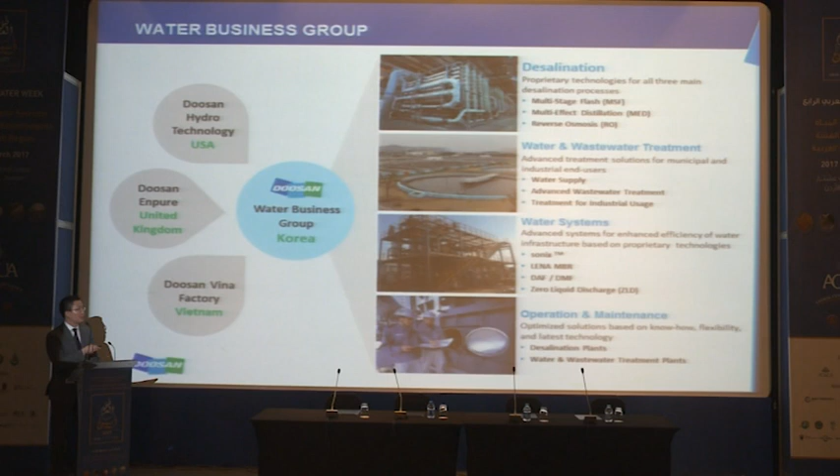Traditionally known as the powerhouse in the thermal desalination market, we have significant references in both MSF and MED markets. One example is the Yanbu Phase 3 MSF plant that we have executed for SWCC of Saudi.

The plant itself features the world's largest multi-stage flash evaporator, which creates more than 91,000 cubic meters of fresh water per day out of one single evaporator.

In the MED sector, we have the Yanbu Phase 2 expansion MED plant, which features the world's largest multi-effect distillation distiller, and the single unit capacity of the plant is more than 68,000 cubic meters of water per day.

Depending on client needs, driven by fluctuations in seasonal or regional variations, we also offer a configuration of hybrid plants, meaning combining the membrane RO solution with either MSF or MED.

One great example is the Ras Al Khair Phase 1 hybrid desalination plant located in Saudi Arabia. Upon completion, it's said to be the world's largest desalination plant, with a capacity of more than 1 million cubic meters of fresh water per day.

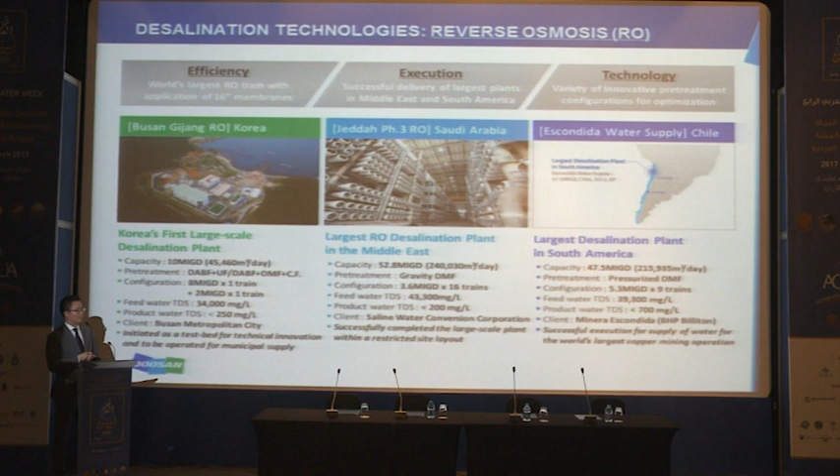We also take care of the plants that we build by providing flexible O&M services. Our strengths in O&M really come from accumulated commissioning experiences over the last 30 years.

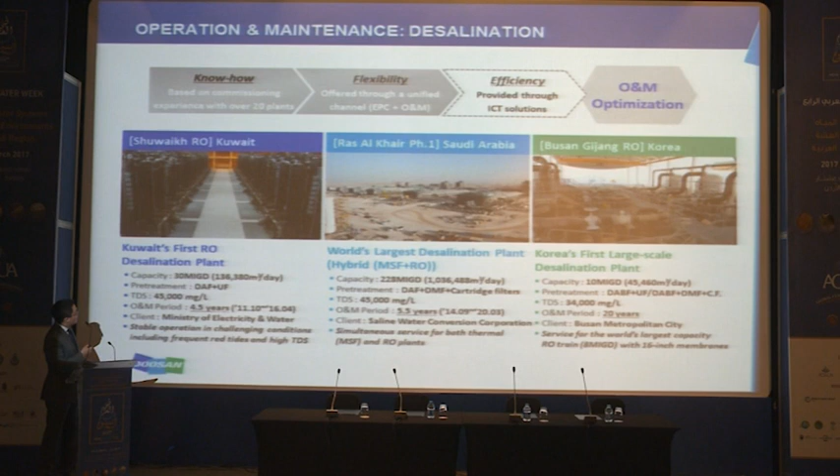We also provide flexibility for our clients by becoming a unified channel of EPC and O&M contractors. For the Ministry of Electricity and Water in Kuwait, we were the EPC provider for Kuwait's very first RO desalination plant.

Shuwaikh RO, and the client entrusted us to provide operation and maintenance services for them on a 4.5-year O&M contract. Also, going back to Ras Al Khair, we are currently providing 5.5-year O&M services for the client SWCC.

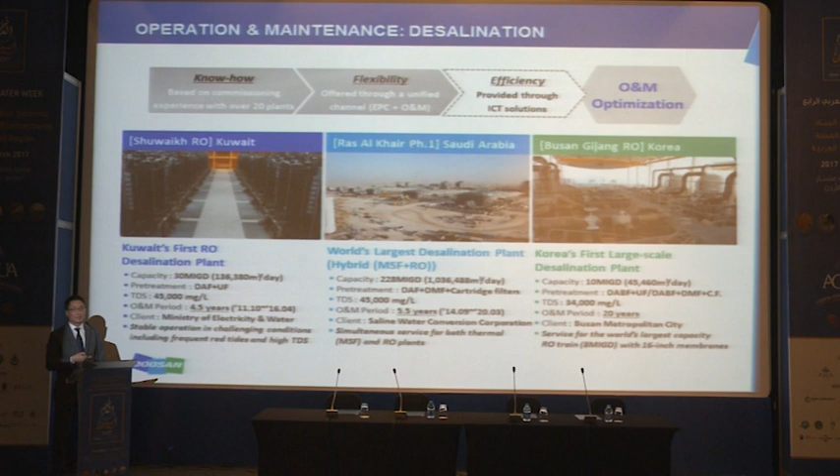And also, back in Busan, we are currently negotiating the terms of a 20-year O&M contract with the Busan Metropolitan City Government.

We are currently the largest water producer in the GCC market, providing water for 20 million people on a daily basis. Some of our efforts in R&D, the Doosan Water Business Group alone is operating 4 R&D centers located in Dammam, Saudi Arabia.

Seoul, as well as Changwon in Korea, and Birmingham in the United Kingdom. Each of these centers has its own set of R&D topics depending on regional and client needs.

One particular example I would like to highlight is the Dammam R&D Center in Saudi Arabia. Given the regional specific needs, we are specifically concentrating on development of thermal desalination technology out of this center.

I would like to highlight this case as a successful example of joint R&D initiatives between a government client and a private company. Given the fact that Saudi Arabia is the largest desalination solution adopter in the market, they have the strongest drive to develop and enhance their desalination technologies and platform.

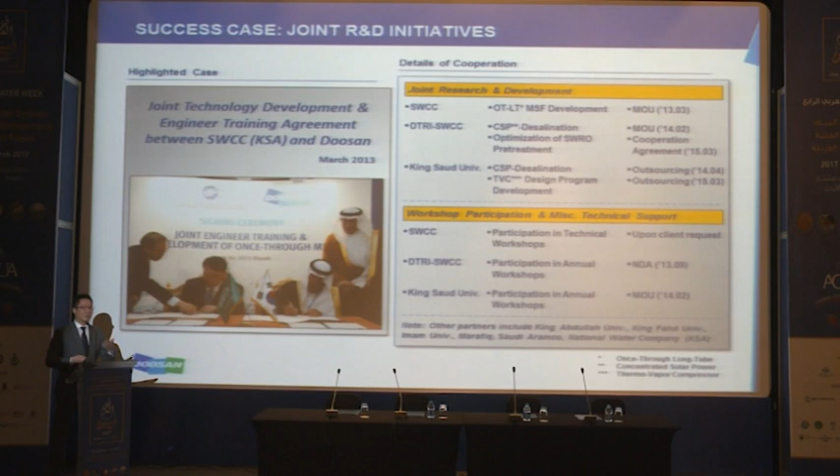We have been called back on numerous occasions to cooperate with SWCC as well as the DTRI R&D Center under the management of SWCC, as well as King Saud University, to co-develop many of the thermal desalination as well as other RO or wastewater treatment technologies. We still have a lot of ongoing agreements with the entities and government authorities there, and we are looking to further develop such relationships and contribute further to the enhancement of the water infrastructure here in the GCC, as well as any parts of the world.

From feasibility studies to EPC as well as operation and maintenance services, we are a one-stop house when it comes to water solutions. We are also aggressively participating in BOT as well as PPP projects, and one great example would be our participation in the Red Sea Dead Sea project to be tendered by the Ministry of Water and Irrigation here in Jordan. We really look forward to providing the most competitive solution on behalf of our consortium as well as for the government here.

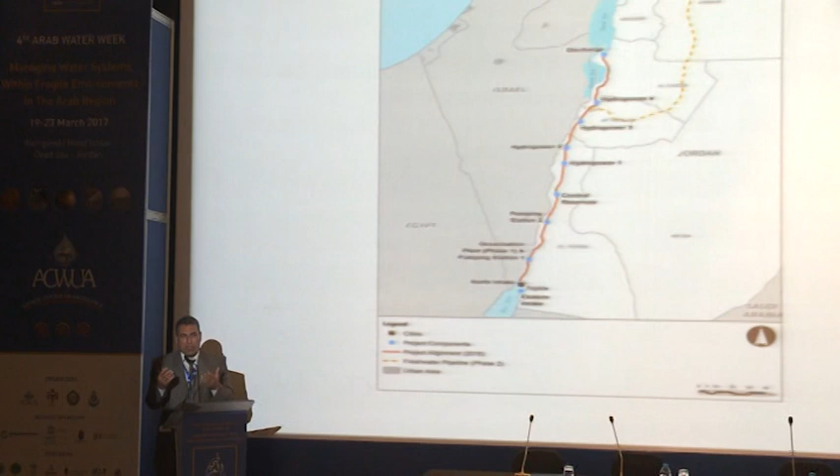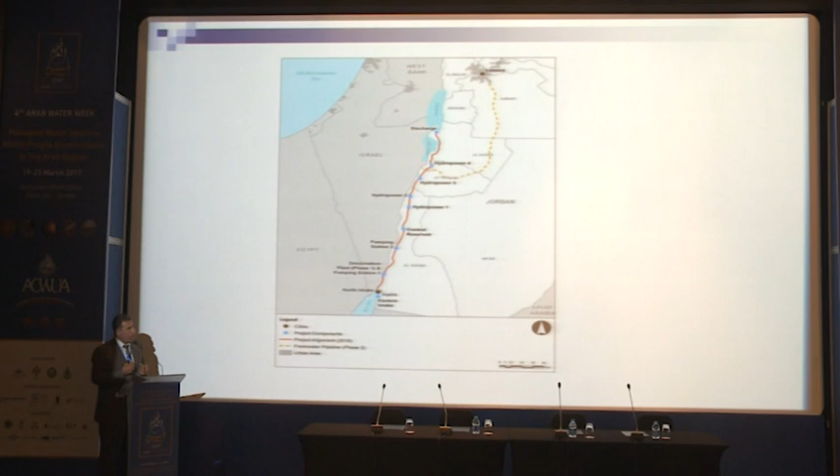Everybody, I think, knows about the Red Dead Canal system, a strategic project in Jordan, where we're going to pump water from the Red Sea in the southern part of the country to the Dead Sea, as you see here, through a water carrier system. Because there is a difference in elevation, the water will be pumped to a certain stage, and by gravity it will flow to the Dead Sea from there.

Once the water flows to the Dead Sea, there is a big difference in head, so we can use that head to generate electricity, to provide us with a source of energy to minimize or reduce the cost of the desalination option.

In phase one, we are targeting to treat about 60 million cubic meters, which is underway. This project is currently underway. We've been asked as a consultant recently to start studying options to minimize the energy cost, in addition to generating electricity from the difference in head.

We have to look at other options because we have a unique case here: the Dead Sea. The Dead Sea salinity is 10 times more than seawater. We have brine water which can flow to the Dead Sea, and seawater at a certain stage in the future, because we need to recover and at least stop the drop in water level in the Dead Sea, to protect it. So we're going to discharge the brine and seawater into the Dead Sea.

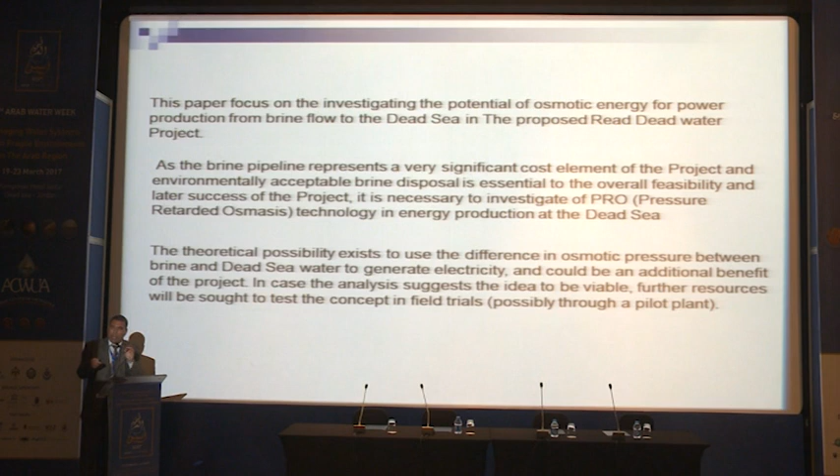So what we need from the technology and from the companies now is to study this unique case, because we noticed there may be challenges related to membrane permeability. The technology should help us put options forward for how we're going to solve this problem once we apply the PRO system in the Dead Sea case.

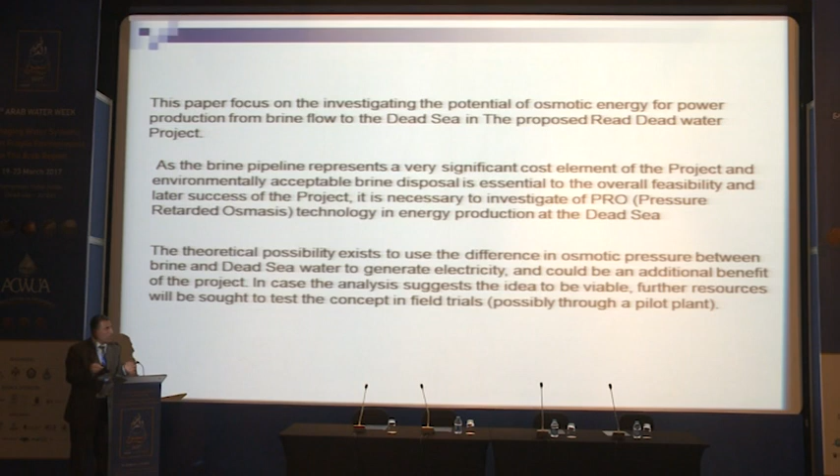We would like to see more of the knowledge gained by these companies, especially the previous presenters, about their work experience in the Gulf or around the world, and how they would handle such a case, because the permeability of the membrane is one of the main challenges we are facing.

For example, as you can see here, there is... let's go here.

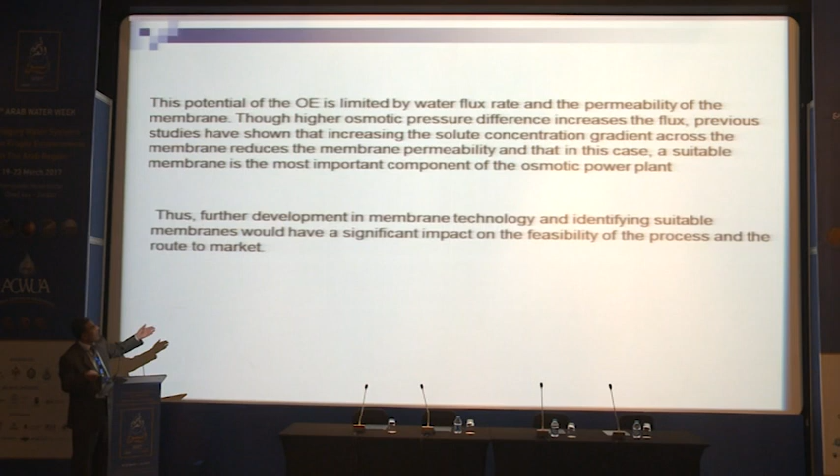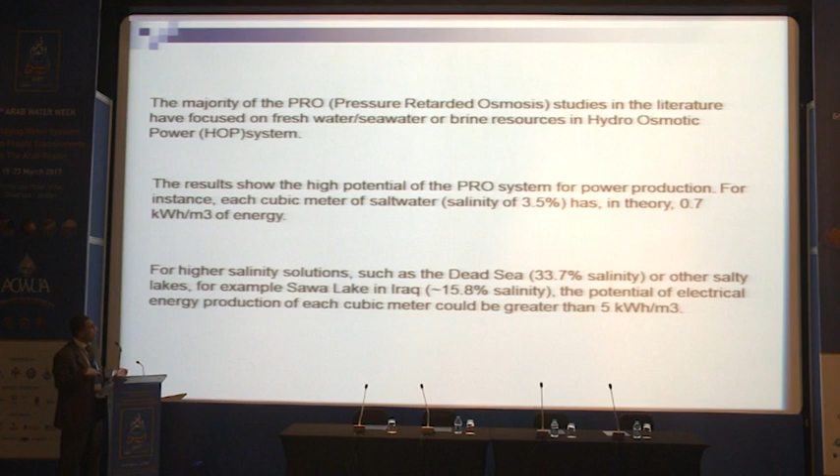We're talking about how we can get energy from this PRO system, especially in the Dead Sea, given the salinity. There's another example in Iraq, the Sawa Lake, a similar case, with 15.8% salinity. This is another case in the region, and there are several other cases facing a similar situation.

What we need is to investigate this option thoroughly in order to apply it to the Jordanian case. This is what we are hoping for from the expertise of the Korean companies, to help the Jordanian government. We are now preparing a white paper on the PRO option, assessing whether it's feasible and how far we can go with it. We're going to provide a recommendation to the Ministry of Water in Jordan before this summer.

Hopefully we will come back to you to get feedback so we can include it in our recommendation to the ministry. If this is a feasible solution, we can go forward with it, and it will be an opportunity for the Korean government to provide help and support in this regard. Later we may expand to other countries like Iraq when the situation improves there. Thank you very much.

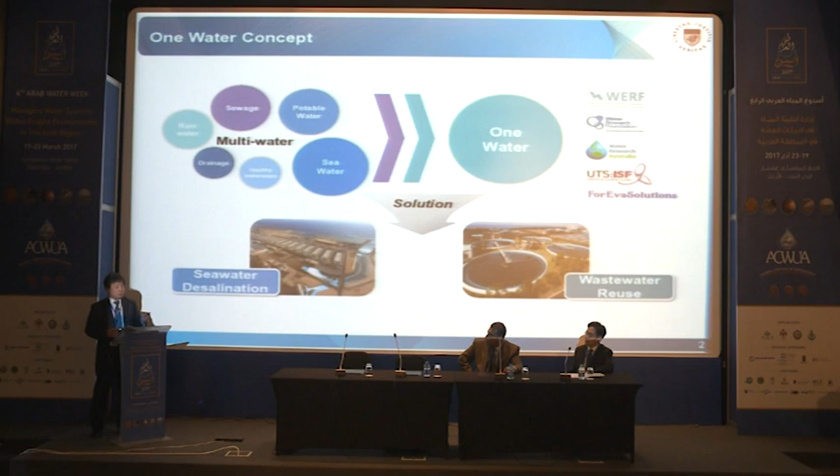So we try to integrate all available water resources, including wastewater, seawater, desalination projects, and water reuse projects. Those are the two options we have to explore for the future. However, desalination is still a very energy intensive process.